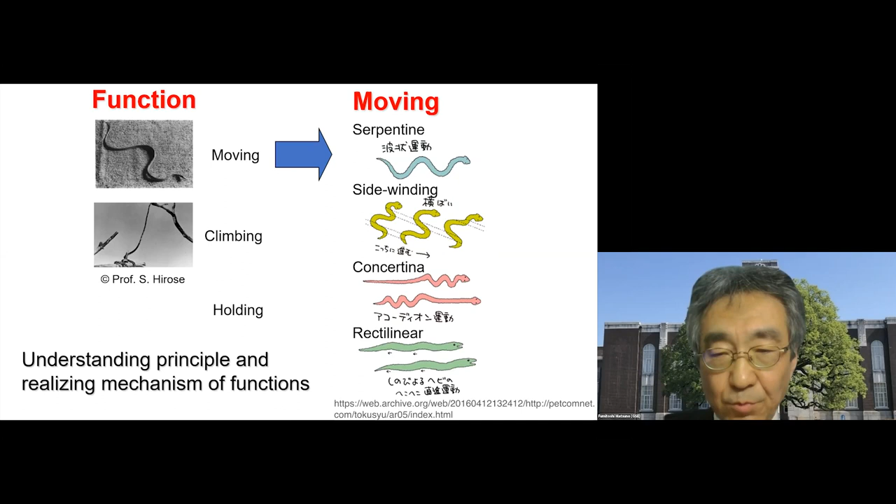As a first example, we consider snake locomotion. A biological question is why a snake can move without legs. A living snake has many functions, not only moving but also climbing, holding, and so on. In moving, it has many locomotion patterns, for example sidewinding, serpentine, and concertina. Understanding the principle and mechanism of these functions is very interesting.

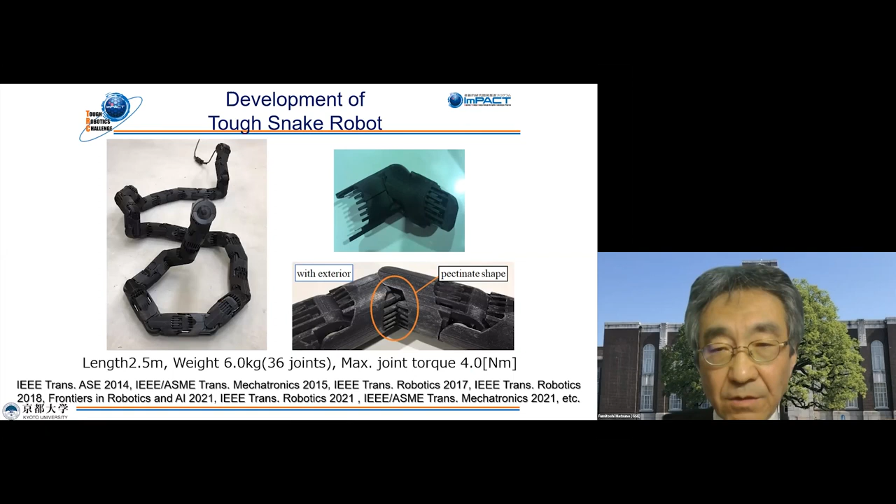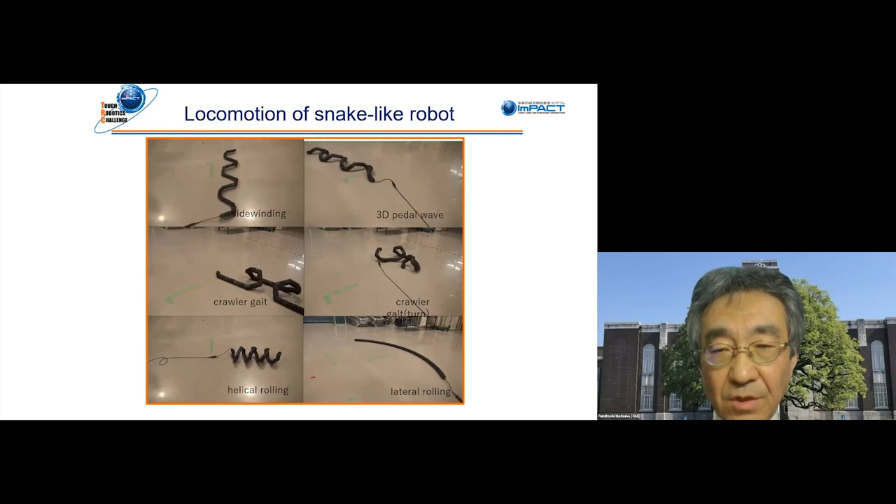We have developed some snake-like robots. This is a tough snake-like robot developed in 2019, and our developed robot has many locomotions. This is sidewinding, like a living sidewinder snake, and the other five locomotions shown in this slide are artificial motions that a living snake does not have.

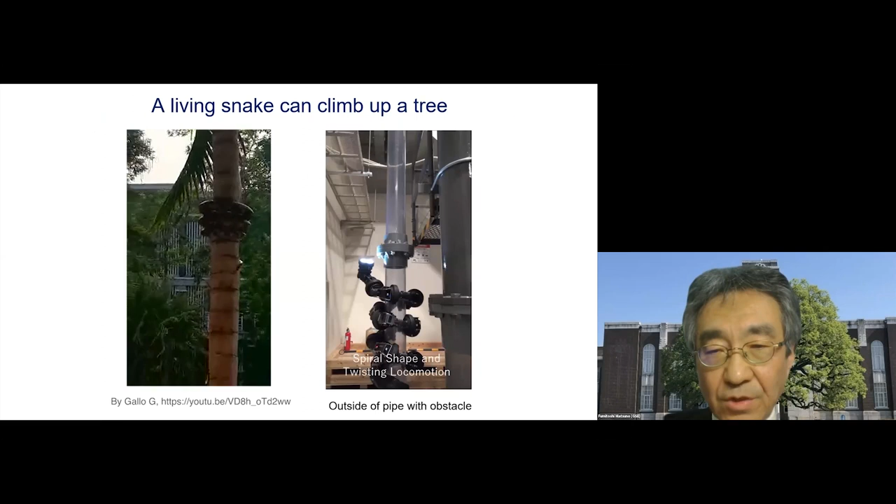You can see a living snake can climb up a tree. It makes a fixed point at the tree, and a part of its body is lifted up and another fixed point is made. Inspired by this movement, we designed a climbing motion by combining a spiral shape and twisting motion.

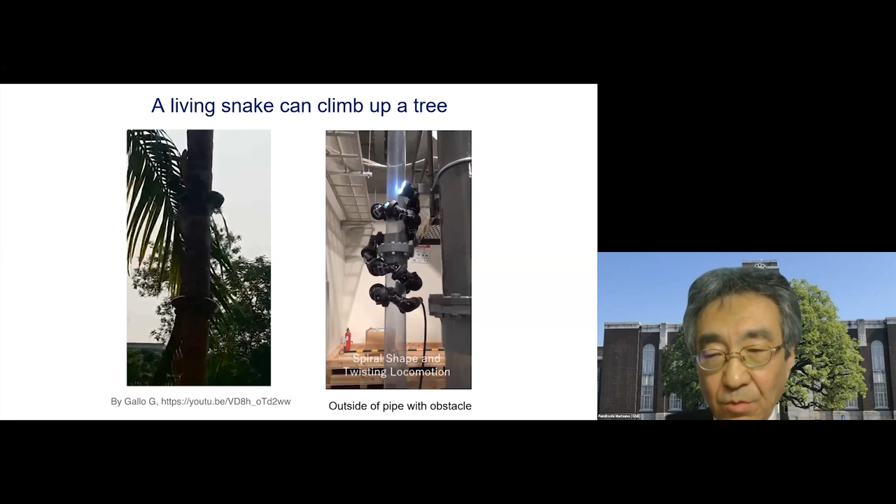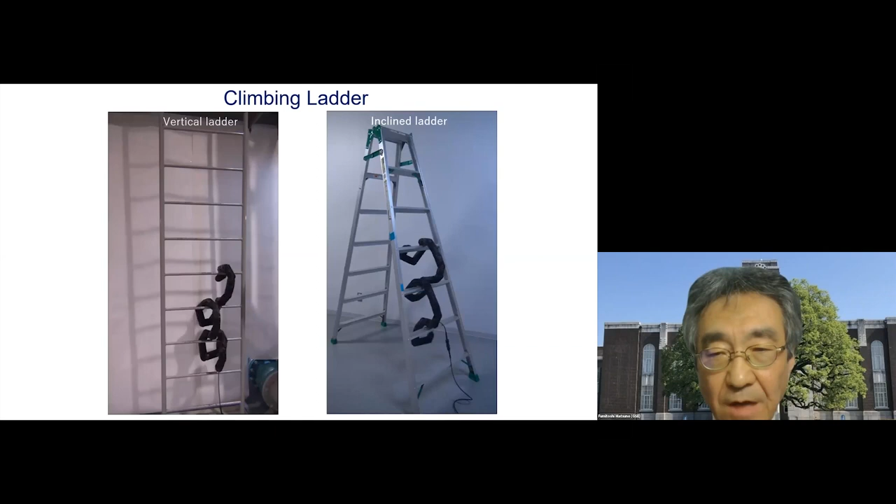This movie shows the movement of the snake robot climbing ladders. It can climb up both vertical and inclined ladders. Note that the cable connected to the snake robot does not become caught in the ladder.

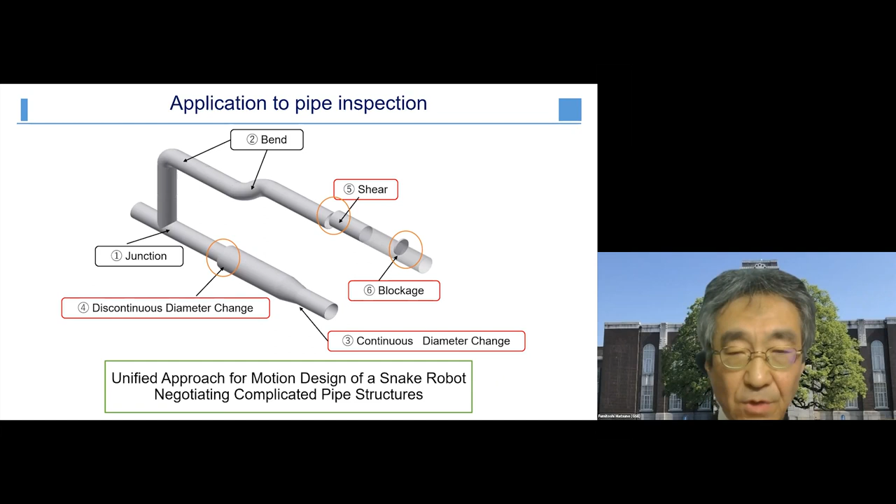We can apply a snake robot for pipe inspection. There are various types of pipes: junctions, bends, continuous diameter changes, discontinuous diameter changes, and shear, and blockages. We propose a unified approach for motion design of the snake robot negotiating complicated pipe structures. This movie shows the motion of the snake robot inside a 20 centimeter diameter pipe with a 90-degree bend and junction.

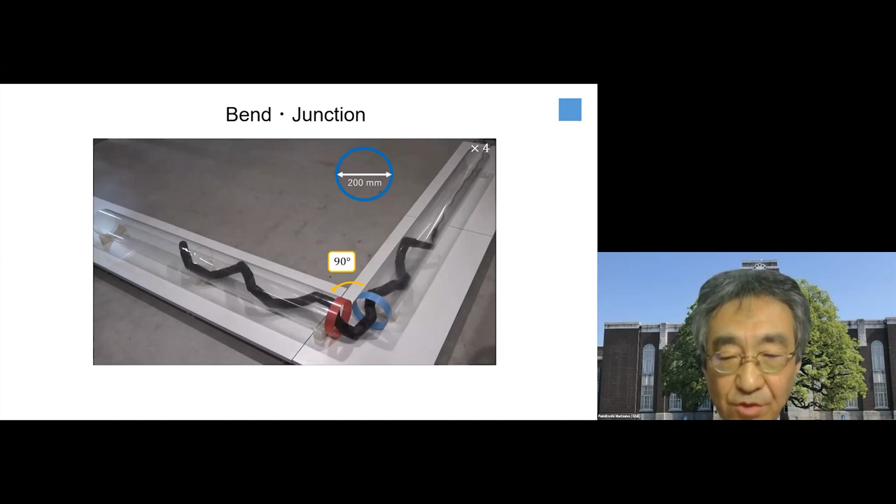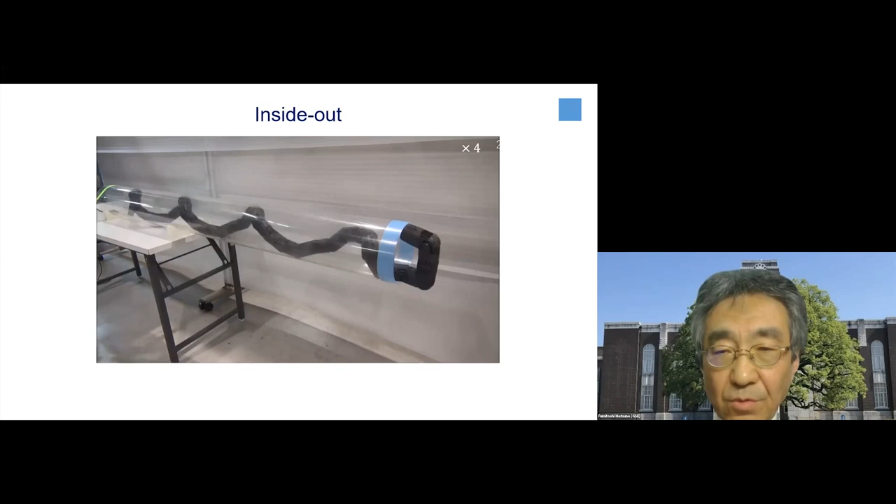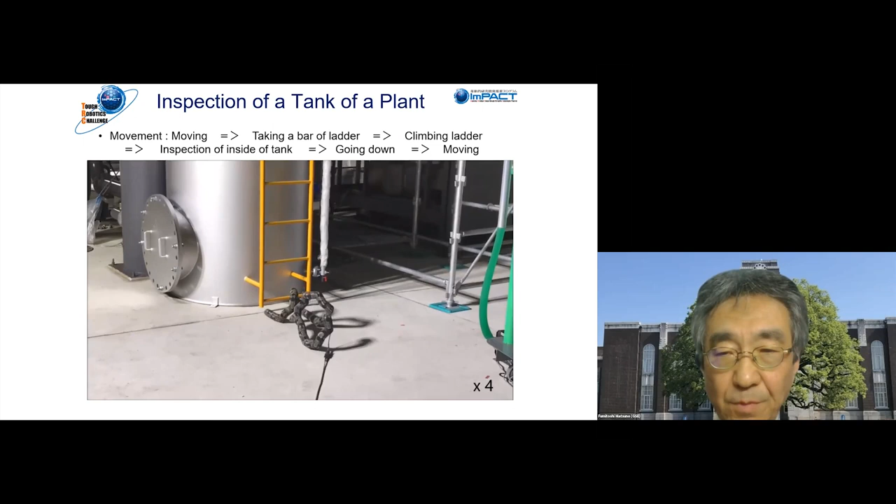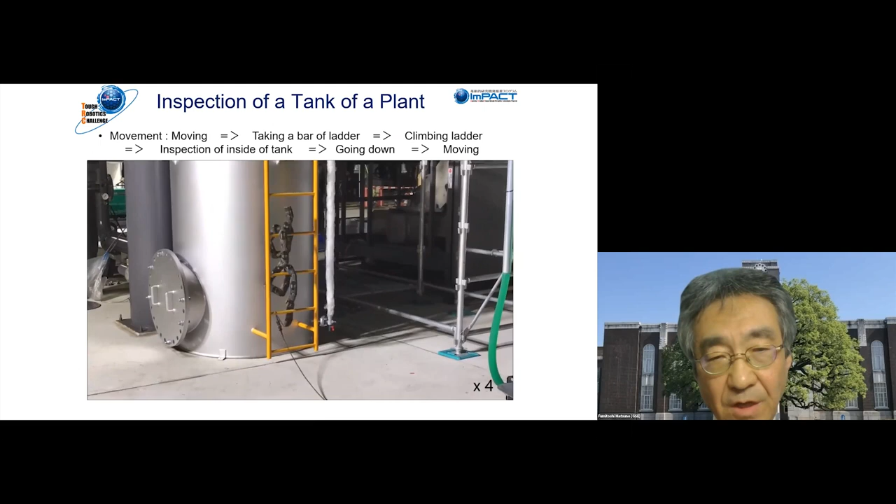Another application of the snake robot is the inspection of plants. This movie shows a demonstration of inspecting the inside of a tank at a plant. The robot climbs up the vertical ladder, and at its head, a CCD camera and other sensors are mounted. Using these sensors, this robot can collect information inside the tank.

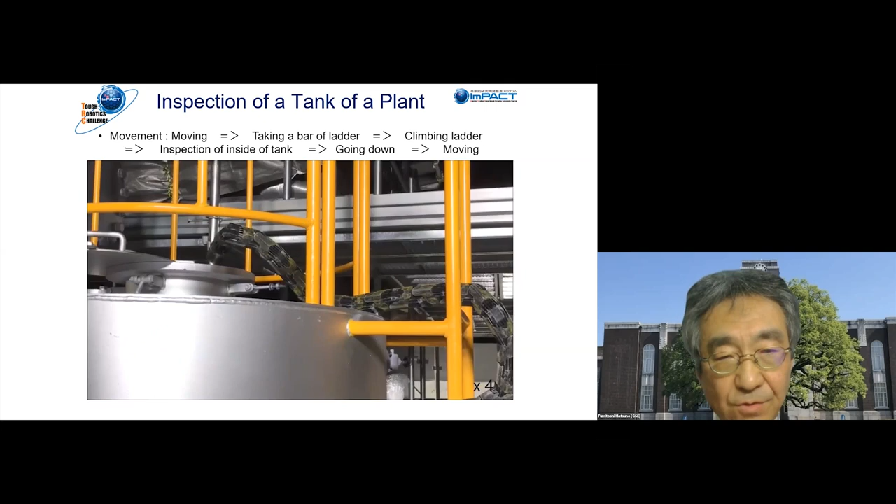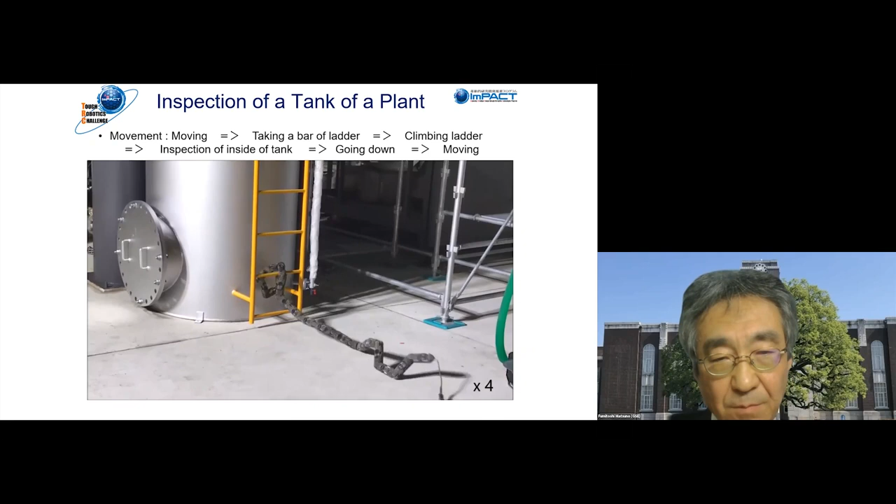Now the robot goes down the ladder, and it changes its shape from the climbing ladder shape to the crawler gait, and it can move like this.

Let us consider the number of legs of living things. Snake has no legs, human 2 legs, cat and dog 4 legs, insect 6, octopus 8, and squid 10. So living things tend to have even numbers of legs. But the robot is an artificial thing, so we can create a robot with an odd number of legs.

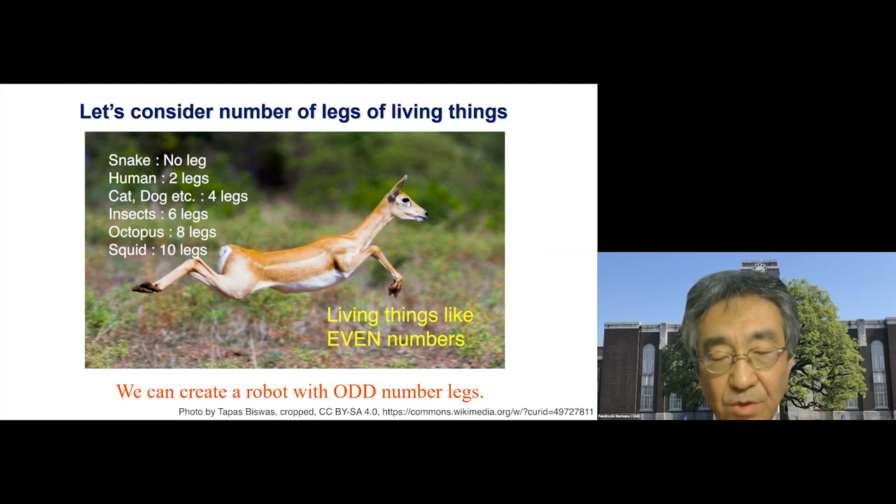Our final objective is not only understanding living things, but also going beyond living things. Currently we developed a modular one-leg robot. There is no one-leg natural creature, so it is difficult to generate its locomotion intuitively.

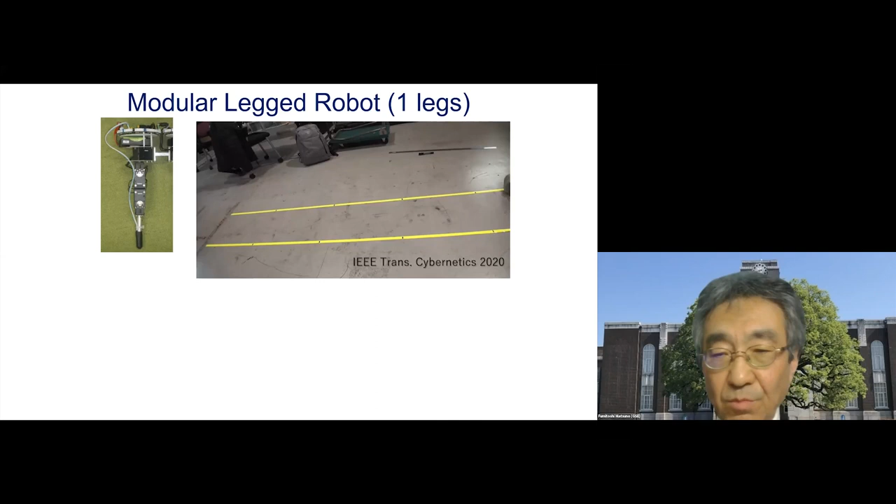By applying our proposed learning method, the one-leg robot generates this kind of moving behavior. The modules can connect to each other and create clusters with various configurations. For example, a 6-leg asymmetric cluster, a 7-leg V-shaped cluster, and a 6-leg insect-like cluster.

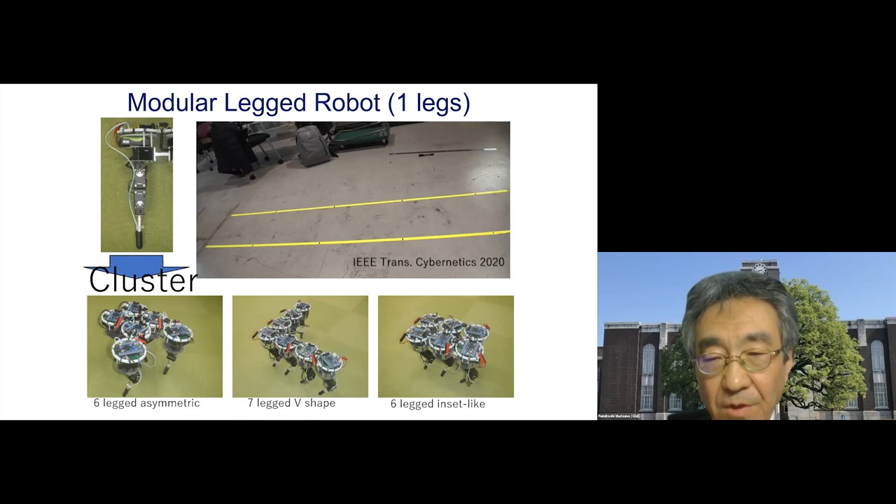We should design an autonomous distributed system for gait generation for the one-legged modular robot, connected in various configurations with any number of modules.

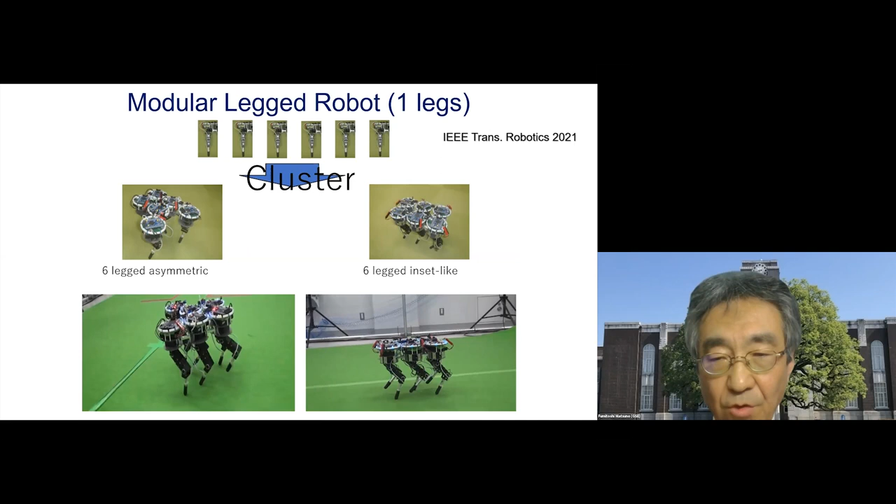This movie shows stable walking for the 6-leg asymmetric and insect-like clusters. Each walking gait converges to straight movement, and straight movement is achieved. In the case of the insect-like cluster, its walking pattern converges to the tripod gait, same as an insect. In this case, the 7-leg V-shaped cluster realizes stable turning motion.

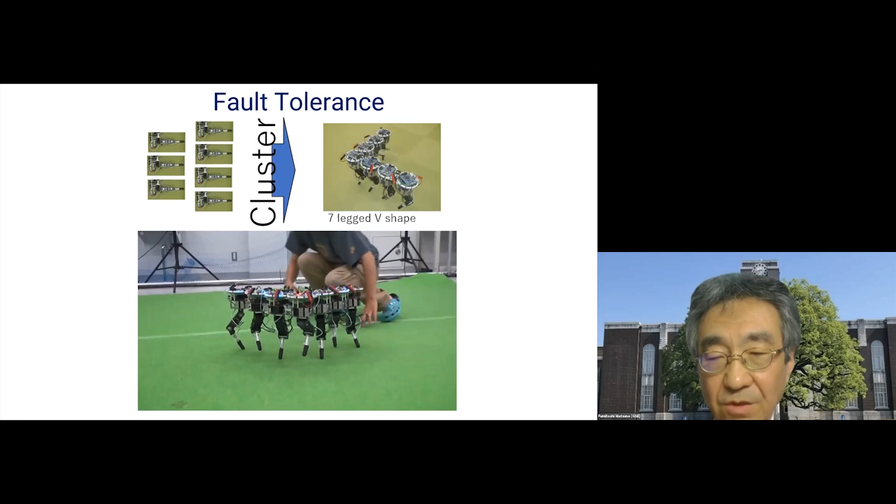After the walking gait has converged, the signal lines of module 4, the central module, are cut. The cluster's gait pattern shifts to another pattern. This means that after a leg is broken, the cluster achieves stable walking again. We can conclude our proposed autonomous distributed system is robust against leg malfunction.

Next, let us consider another biological question: how can ants communicate with each other? What is the decentralized control strategy of swarm behavior in social insects? The modular robot, as shown in the previous slide, is a kind of swarm robot.

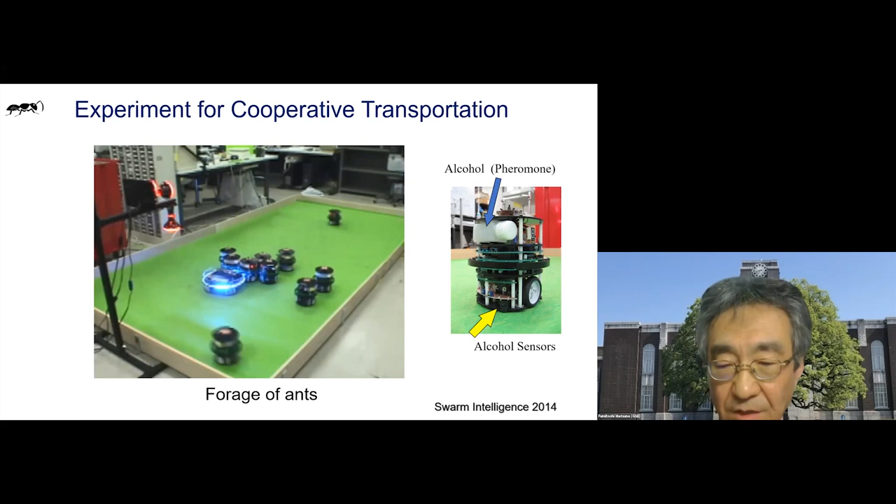I would like to introduce leader-follower navigation of a swarm robot by decentralized control strategy. Each robot has a sensing region. One is the leader, which knows the desired path. The followers do not know the desired path, nor which robot is the leader.

An agent receives attraction and repulsion forces from agents within its sensing region. Also, a repulsion force is designed between an agent and an obstacle to avoid the obstacle. This is a very simple control behavior based on the potential function.

Followers can avoid deadlock at the entrance of the narrow space and can follow the leader. As the leader approaches the entrance of the narrow space, the followers avoid the deadlock and form a straight line to pass through this narrow path area. After passing through the exit of the narrow space, the formation changes from the straight line to another formation.

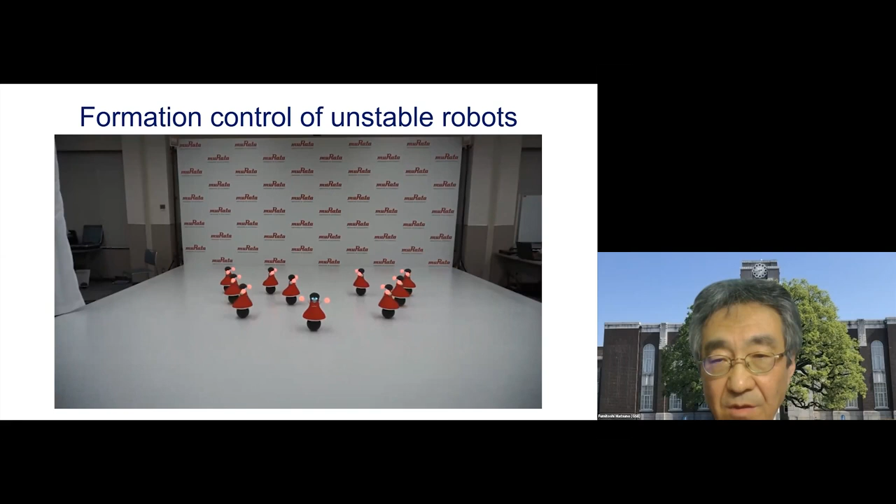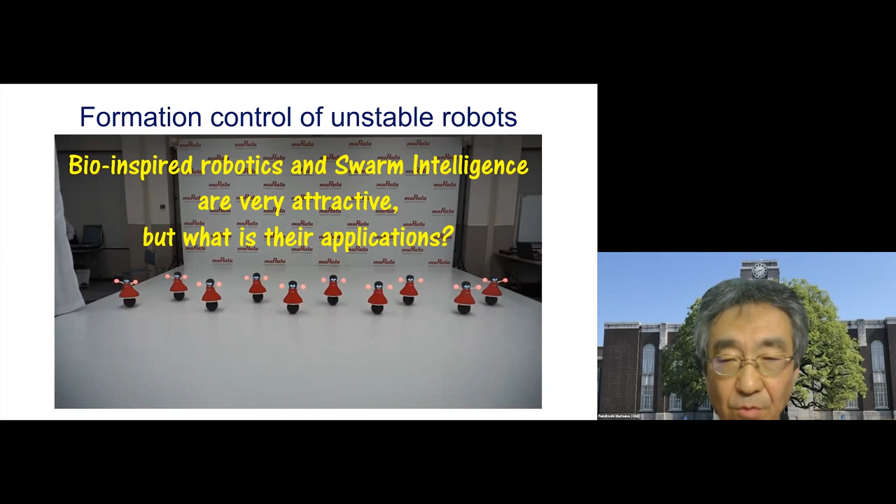Each robot should balance on a rolling ball and maintain formation. This is only entertainment, but bio-inspired robots and swarm intelligence are very attractive and interesting. But what is their application? It's very important from the engineering point of view. We think the development of a rescue robot system is an application of bio-inspired robots and swarm intelligence.

So based on experience from the Hanshin-Awaji earthquake in 1995, we have developed a rescue robot system. In 2011, we had the Great East Japan earthquake. We visited a disaster site with our developed rescue robot. As you know, the Great East Japan earthquake is a complex disaster caused by not only the earthquake and tsunami, but also the Fukushima nuclear power plant accident. Humans cannot enter the damaged building at Fukushima. Robot technology should be used.

In 2018, we applied a snake robot and crawler robot at the landslide disaster site at Okayama. Toughness is very important for the disaster response robot system. Robustness and flexibility of social insects and living things are a good hint for toughness of the disaster response robot system.

Okay, so next we will consider what is a robot. So please answer the following question. If your answer is yes, you can use the reaction function and please raise your hand. Okay, first question is, do you think an airplane is a robot? If yes, please raise your hand. I cannot find the number. Okay. So I don't know how many persons answered yes. Okay, so next, do you think a car is a robot?

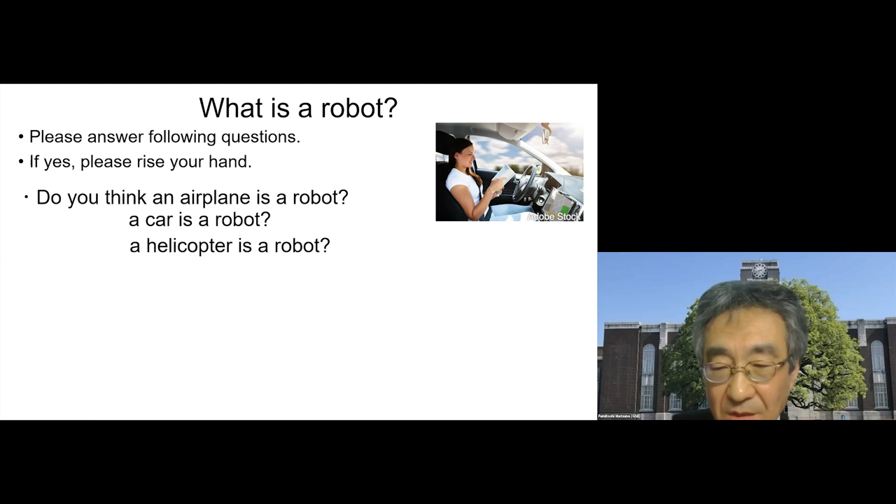Maybe not so much. And currently, a car has an auto cruising function. Okay. And next, do you think a helicopter is a robot? Not so many people agree. So this is Yamaha R-Max. This is an autonomous helicopter. And do you think Roomba is a robot? I guess many of the audience raise your hand.

So what is the difference between robot and others? Maybe Roomba is a robot and others are not a robot. What is the current style of the cleaner? This is a cleaner. The Roomba is completely different from the current cleaner. It is curious and has no name. So we call Roomba a cleaning robot, in Japanese, osoji robot. So if Roombas are widely used for more than, for example, 10 years, the word robot will disappear and we call it a cleaner. As long as the word robot is added, it is curious and not an actual convenient tool for us. If the word robot is erased, it is evidence that it is truly useful for humans.

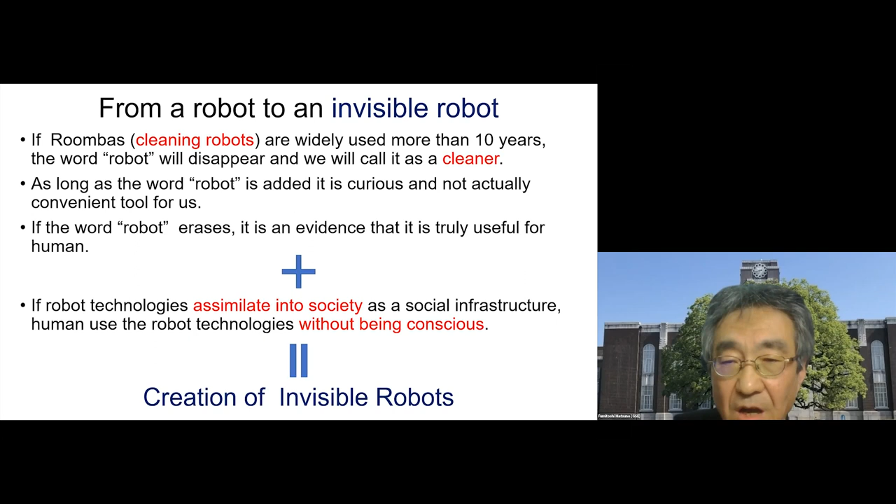And I think if robot technology assimilates into society as a social infrastructure, humans use the robot technology without being conscious. So I say that I would like to create invisible robots. In the first part of this talk, I said that we should make a bridge between understanding of nature and engineering application. Based on understanding of living things, we can create useful robots for humans and beyond living things. But I think it is not sufficient.

Currently, the COVID-19 pandemic is a very serious problem for humans in the world. People say coexist with virus. I'd like to explain the concept of deep ecology. This deep ecology platform by Naess and Sessions in 1984 is very significant. The well-being and flourishing of human and non-human life on Earth have value in themselves. These values are independent of the usefulness of the non-human world for human purposes. Humans have no right to reduce this richness and diversity. Present human interference with the non-human world is excessive, and the situation is rapidly worsening.